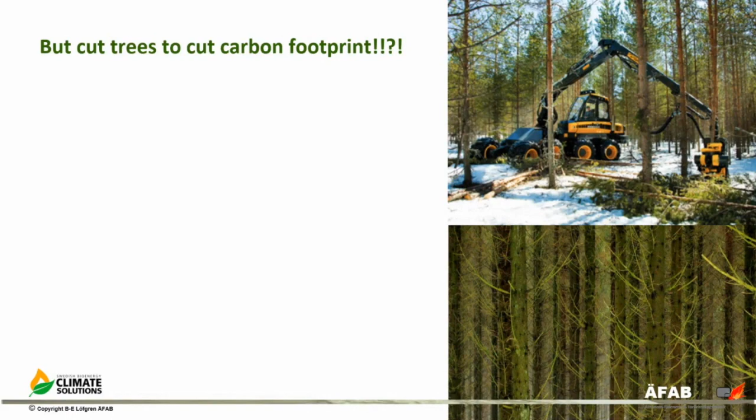But cutting trees to cut carbon footprint - is that the right way? We have lots of discussions all over the world about this. I have to say, as hard as I can, biofuels in any form can never emit more carbon dioxide than the trees already took from the atmosphere during their growth. So sustainable forestry is necessary, and has to be in terms of increased growth - that means thinnings and so on, and active forestry.

To replace steel and concrete in building is the same as locking up carbon for many years in the building constructions. And the residues, when you make timber, we can produce clean energy and replace fossil heating - that could be wood chips or wood pellets or something, also wood logs in private homes.

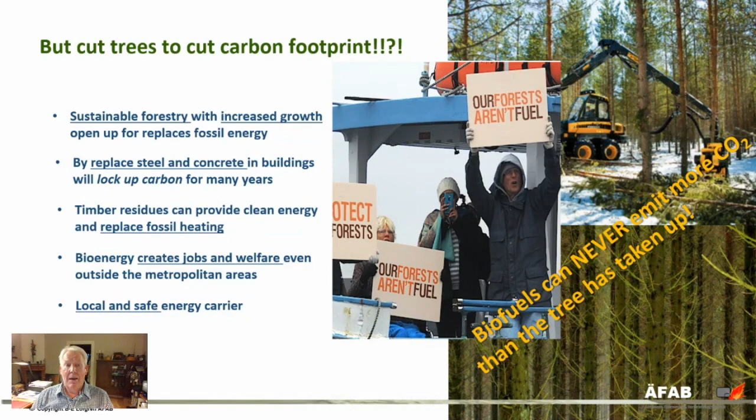Bioenergy creates job and welfare, and it's a local and safe energy carrier. So the discussions about cutting forest are another discussion about biodiversity and so on, but for covering the climate effect, we need to have biomass.

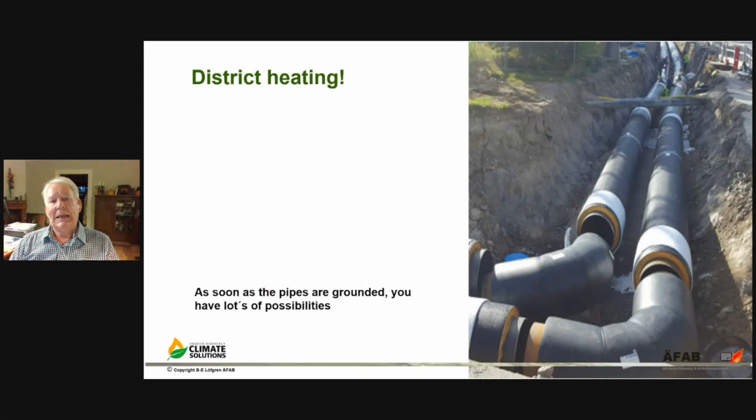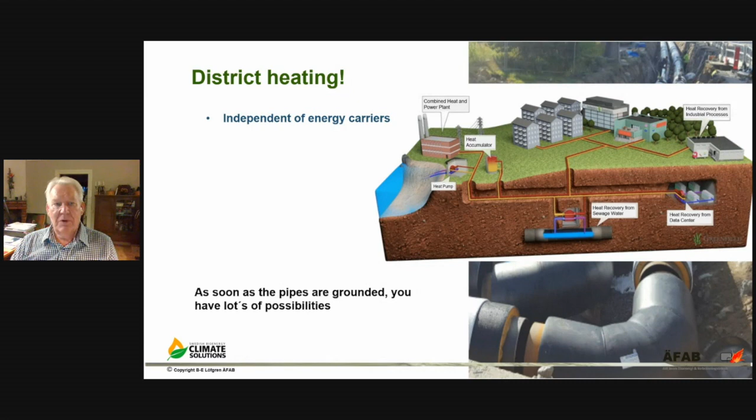Another driving force is district heating. District heating can be done with any kind of energy carrier. But as soon as you dig down the pipes in the ground, you have lots of possibilities. You can implement a plant running it by heat pumps, with oil boilers, with gas boilers, or you can also take care of recovery energy, lost energy from data halls, from industry and so on.

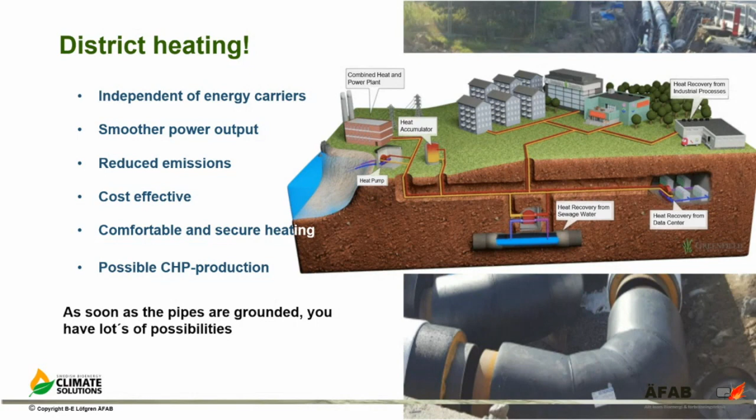At the same time you implement the district heating system, you get a smoother power output. You can spread it out and have fewer peaks. We have reduced emissions with one large central boiler instead of many small boilers. That is also cost effective, and it's comfortable and secure heating. It's also possible to produce CHP - producing electricity at the same time as producing heat.

To start with, biomass in Sweden is 100% residues from the forest industry. We don't cut any trees just for burning.

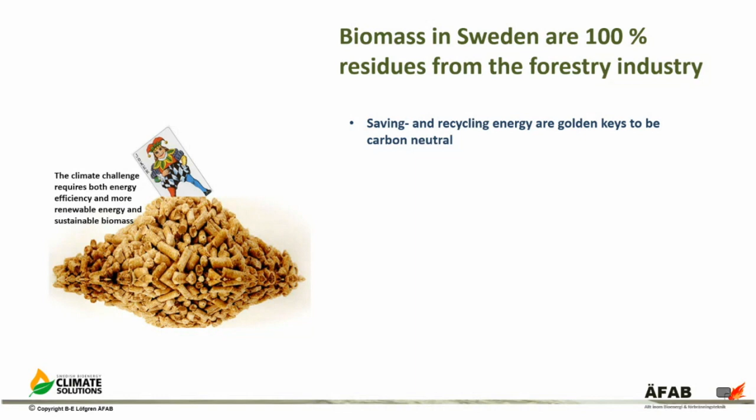We use the trees for making timber or whatever it is, and then we take the residues, the sawmills and the sawdust and the wood chips and so on for energy. But the main thing, the first thing, is to see if we can save energy and recycle already produced energy. That is rule number one.

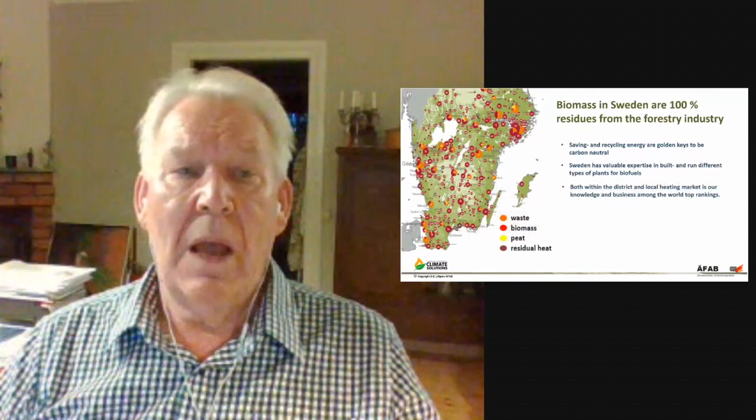But then, if we had to make new energy, take care of new energy, biomass in Sweden is 100% coming from forest industry. You see all these red dots here—those are district heating plants in the society, in the municipalities in Sweden. Sweden has lots of expertise, both in building and running different types of plants for different types of biofuels, both within district heating and local heating markets. Our knowledge and business are among world top ranking.

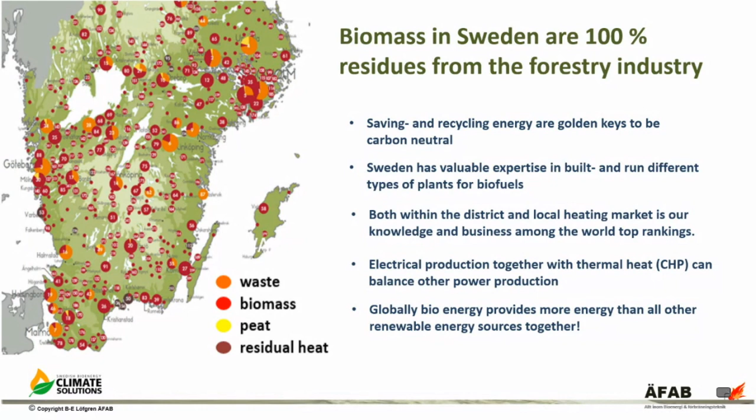Electrical production is, of course, also a possibility, and globally, biomass provides more energy than all other renewable energy sources together. You in Canada, as well as in Sweden, have lots of biomass to take care of. Let's see how it could be done.

Large CHP facilities are, for example, Stockholm Exergi. Stockholm is the capital of Sweden, and you have a grid here. The grid is connected with 10 operated units of district heating plants, and the grid in total is 3,000 kilometers wide. 95% of all buildings in Stockholm, over 800,000 citizens, get their heat from the district heating plant.

It's mainly biomass and waste that are the energy carriers for this, but they also take care of sewage water with heat pumps and cover up with other energy sources as possible. Stockholm Exergi provides 700 full-time jobs.

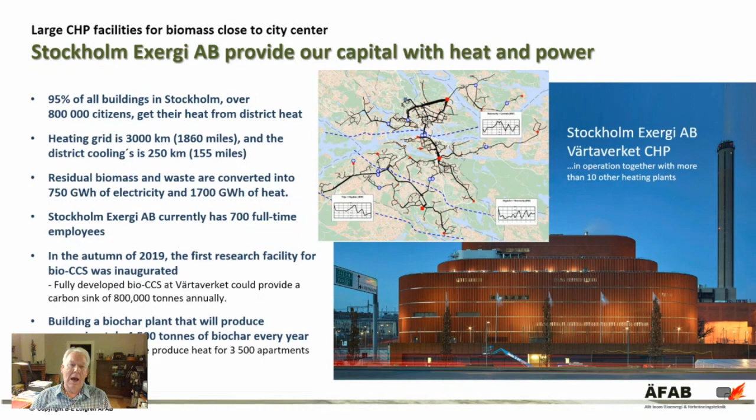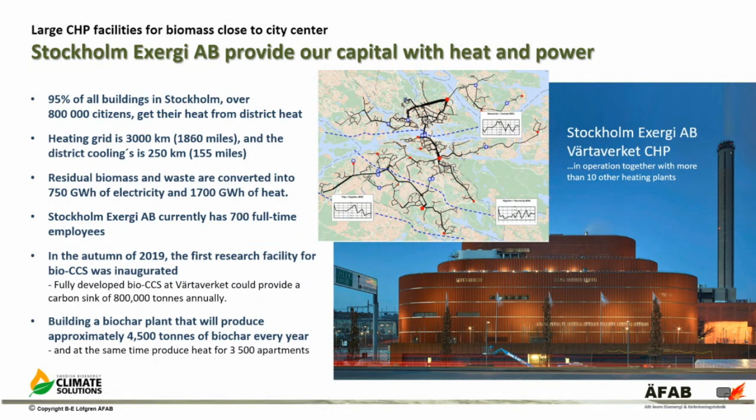They have also started up bio-CCS—carbon capture and storage. They suck up carbon dioxide from the chimneys and dig it down into the ground again. The full capacity of that could save about 800,000 tons annually of greenhouse gases. We have also started building a plant that produces biochar together with heat for more than 3,500 homes.

Stockholm is not alone in producing CHP plants. We have more than 200 CHP plants in Sweden today, and there are more than 30 under construction right now. Biopower from CHP has a really good possibility to balance with wind and solar energy, and the production is highest when the demand for heat is biggest, the largest.

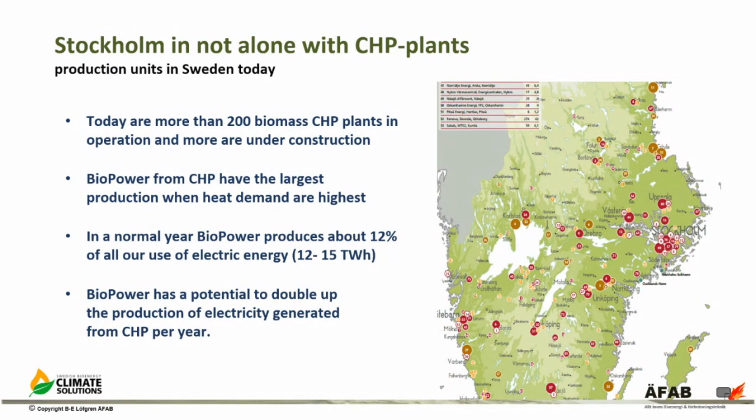In Sweden, we produce approximately 12% of all electric energy use coming from CHP with biopower. Biomass and other renewables are, of course, almost carbon neutral. That's true, but it isn't good enough—we have an ongoing climate change.

I mentioned biochar—it's the gasification of biomass, using the gas for heating, and the biochar as a fertilizer. In this way, we can trap carbon that was taken from the atmosphere, let's say from farmer ground or residues from forestry. We trap it back as carbon, and in this form it's stable coal that you can dig down into the ground as a fertilizer.

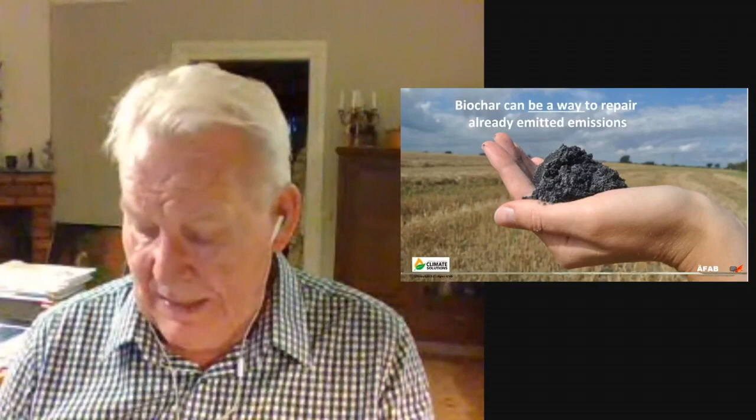I know that you in Canada also have companies producing biochar—you have the Airex company. I can see in the program that they're following up with a speech from Airex. I'd like to tell you that they are also cooperating with Swedish companies in the biochar business. We also have in Sweden a number of smaller plants, sized so that an agriculture operation can have one installed on site.

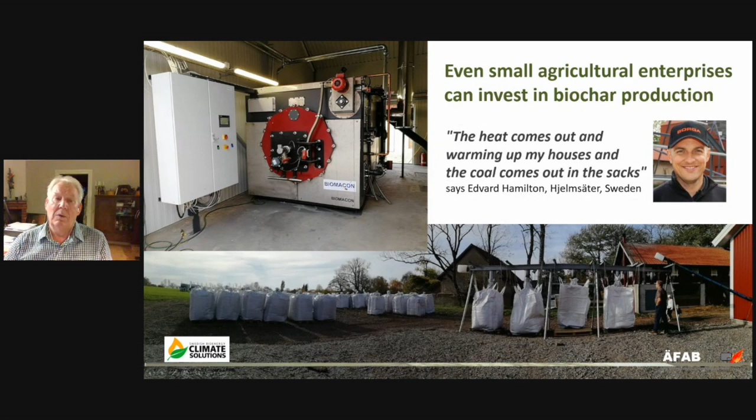This biochar boiler is installed by Edvard Hamilton in Hjelmsäter, Sweden. As he said, it produces both heat for the buildings and biochar for fertilizer—the heat comes out and warms up his houses, and the coal comes out in the sack. So I'm very proud to announce our Swedish success story.

We have a goal in Europe that by 2020, Sweden should have reached 50% renewable energy, while the European Union in total should reach 20%. We already have 55% renewable in our energy balance, and we also have a very high level in the transport sector.

We have, together with Finland, more than 20% of all fossil use—diesel or petrol—coming from biomaterial. That is normally today biodiesel, biomethane, or bioethanol. Not yet so much electricity, but of course electrified cars are coming very rapidly in Sweden as well.

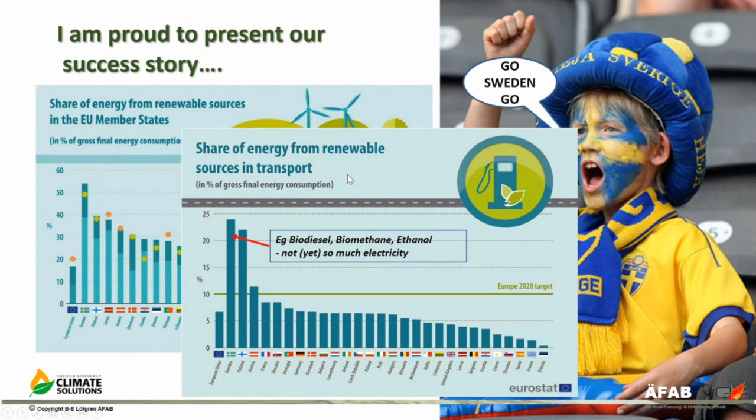So my final conclusion: we have in Sweden probably made most of all the mistakes that can be done. We may not be able to tell you how to do it, but I'm sure we can tell you what not to do. We've made the mistakes, and we're glad if we can help you—let's do it together. We can prove that it is possible to make a difference. Thank you very much.